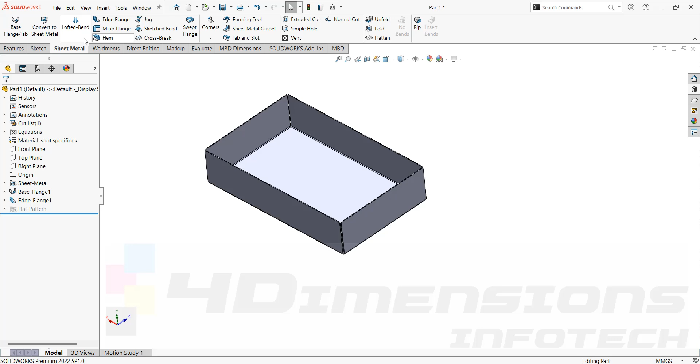So hello everyone, today we are going to see Forming Tool command in Sheet Metal. This is the session 3 for Sheet Metal. Earlier we have seen all the basic commands such as base flange, edge flange, sketched bend, unfold, fold, flatten, extruded cut and more. So today we are going to see Forming Tool operation.

You can see here in the above tab, Forming operation. If you just keep the cursor on that, it will show the definition, that is, uses the parts that act as a die to bend, stretch or otherwise form a sheet metal. Means we are going to make a simple part in part modeling, and then it will act as a die to bend the part, stretch the part or else to form the part in different shapes. So for that only forming tool is used. So we'll start with forming tool.

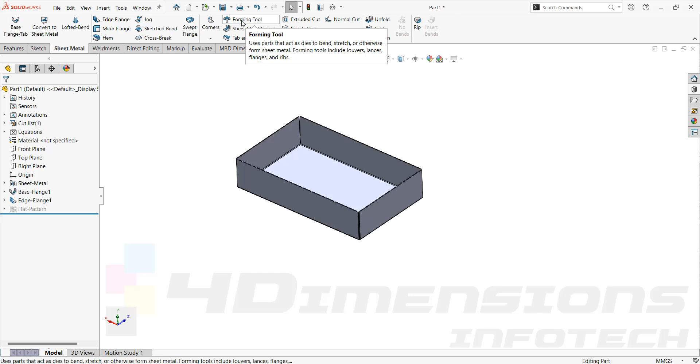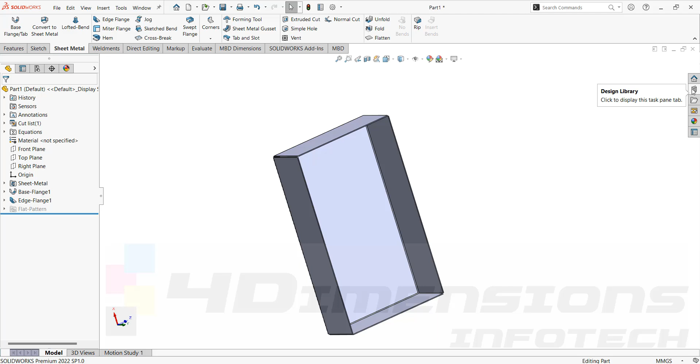We will manually make a tool here. I am saying it manually because there is a design library content also in which you can have a forming tool. But I have not added that add-ins while installation. That's why it is not showing me here forming tool option. But in design library also it is available. That's why I referred the word as we are going to make manually the forming tool. So to make the forming tool, I will switch my window to part modeling. Say part. And now in part modeling, we are going to see how to make this form tool.

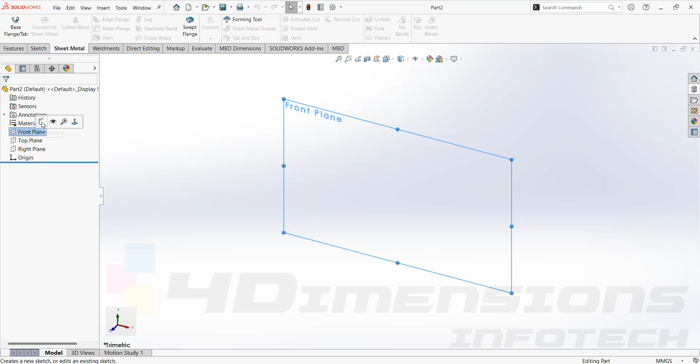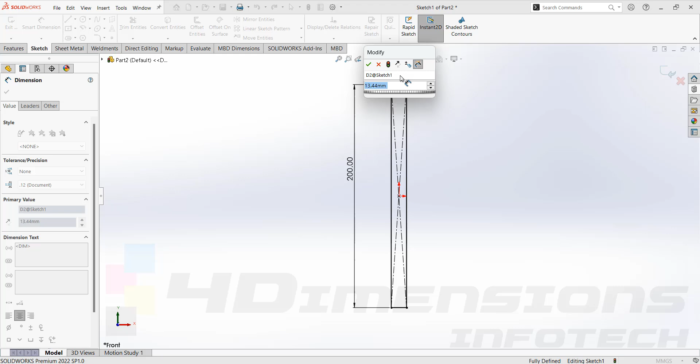I'll go in part, and here I'll start with making louvers here first. I'll select the sketch front plane. We'll make one center rectangle here. I'm using front plane here. Now it doesn't matter which size of rectangle you require. You just need to consider that the size of rectangle shape we are taking here should be always more than the forming tool size. Thickness you can take as much you want. I'll take it 10 mm only.

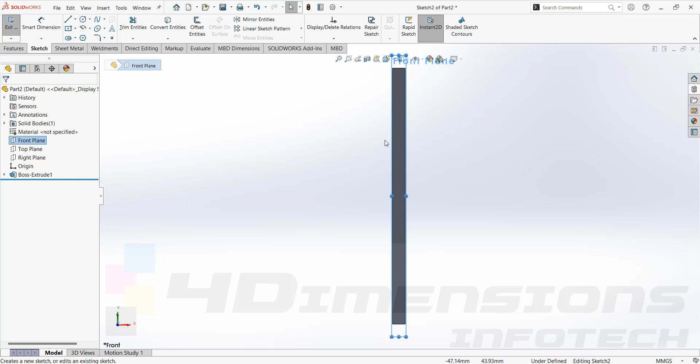Say features, extrude boss. And now while extruding the part, I'll extrude it from mid plane here. Now the role of this part is nothing but to add fillet at the outer direction. For that only I have made this base part. Later I am going to delete this part. I'll take front plane here, say sketch. Front plane was lying in between the part, that's why I have taken front plane. Now we will make sketch to form louvers here.

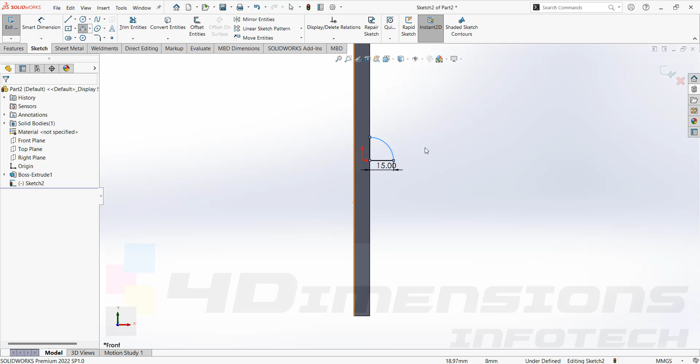Take two lines perpendicular to each other with equal length. I'll say it 15 mm. The other size also 15. I'll say relation between them as equal relation between two lines. Now add one curve also here. I'll take 3-point arc. And we will provide the radius here also as 15 only. Now I have a complete fully defined sketch at mid of the body, that is on front plane.

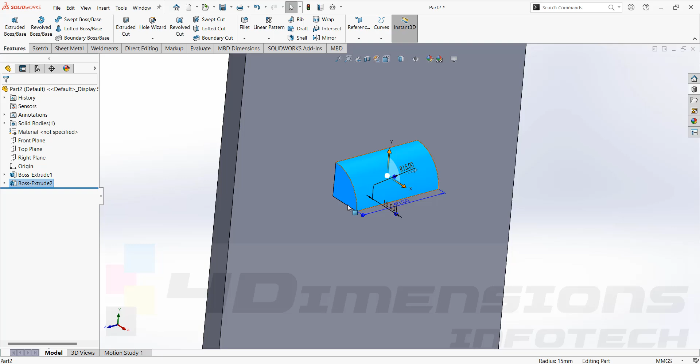Now I'll make extrude boss here. We will extrude it till 40 mm from mid plane. Say OK. Next, I'll select this face here. Say sketch. And I'll select the face and say convert entities. Now these complete edges are converted to sketches. You can see a close entity is formed here. I'll use it for the feature revolve boss.

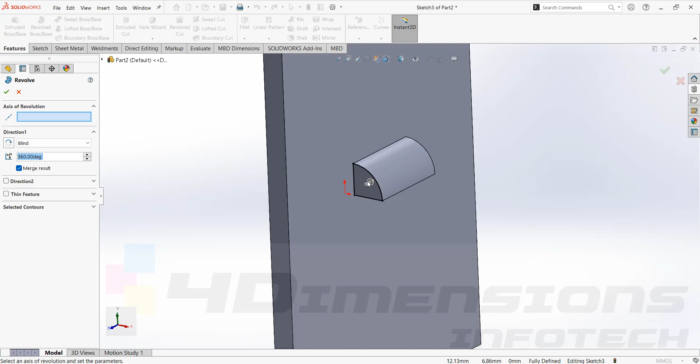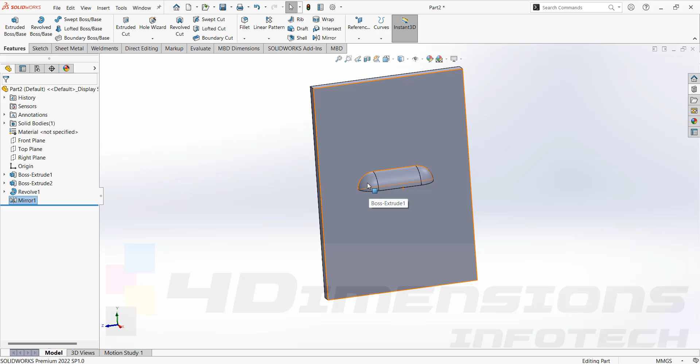I'll consider this line as an axis for revolve, and I'll take this angle as 90 degree here. Say it OK. And I'll mirror this portion at the other side also. So I'll take mid plane here. Say mirror command, features to mirror, and OK. Now this particular feature revolve has been mirrored at the other side also, and our part is completed.

But we have to keep in mind that we have to provide fillets at the edges. As this part is going to be punched in a sheet metal part, at that time, for the withdrawal of this part, these edges should be filleted.

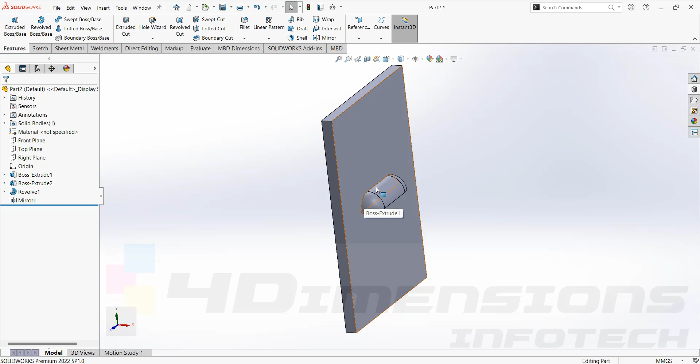If there is a sharp edge, the other part on which we are going to punch the forming tool may get damaged or may have cuts there. That's why we have to provide fillets here around the edges, and it is compulsory that we take a fillet more than the thickness of the part on which we are going to apply the forming tool.

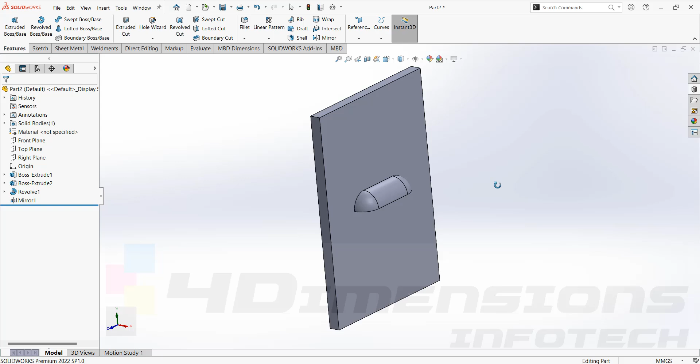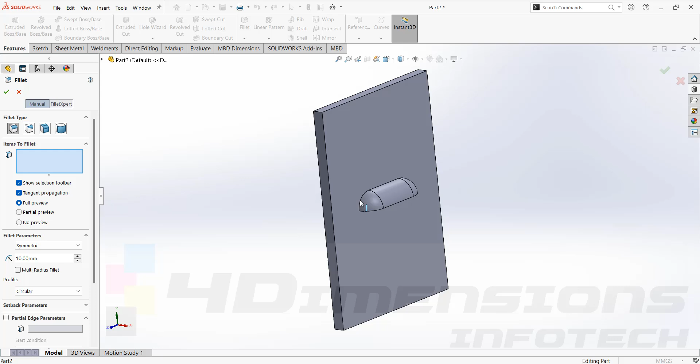Suppose I have taken this part; we have already taken the part here. The thickness for this part was, I'll select this edge, it will show me the thickness here, 1.5 mm. So I need to select the fillet size more than 1.5 mm for the forming tool. So I'll go for the fillet option and select the edges. Fillet is coming around it, and the value for the fillet I'll take here as 3 mm.

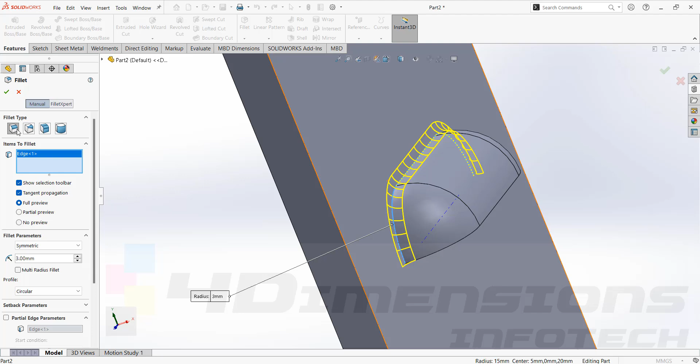This 3 mm value has been taken for the fillet, and now you can see why I have made this surface, so that this fillet should lie on the particular surface outside. If I had not made this plate here, this fillet would have come at the internal side of the part. It would not have been a concave shape, it would have been a convex shape here. That's why I've taken this plate here, so as to make this fillet in a concave shape. Say OK.

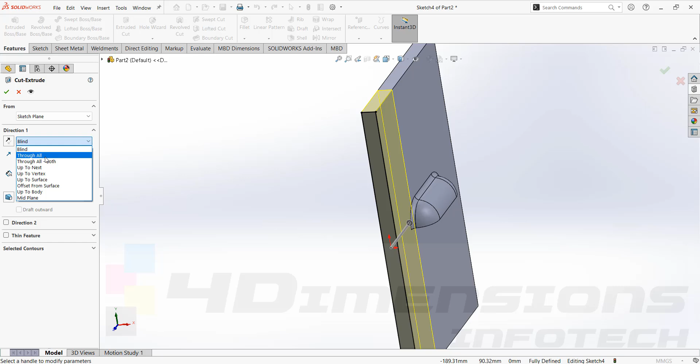Now we will remove this plate here. So I'll select this face, say sketch, and I'll convert that face here. Now you can see one rectangular sketch has been formed. Say features and extrude cut. I'll completely cut this part, say blind and through all. Only through all is needed there. And now you can see one louver shape part has been made here.

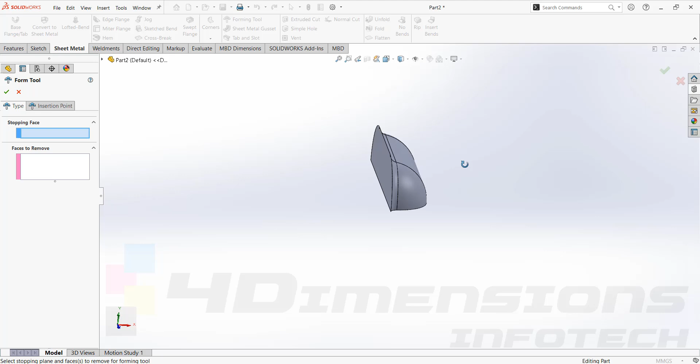Now we will move to the sheet metal tab. And here you have the option forming tool. Select the forming tool after making the part. Now we have to add the stopping face. The stopping face is the face which is going to be attached on the sheet metal surface. So I'll consider this as the stopping face, and for faces to remove I'll consider the bottom face here. We need to ventilate the air from this part, that's why we need to remove this face compulsorily here.

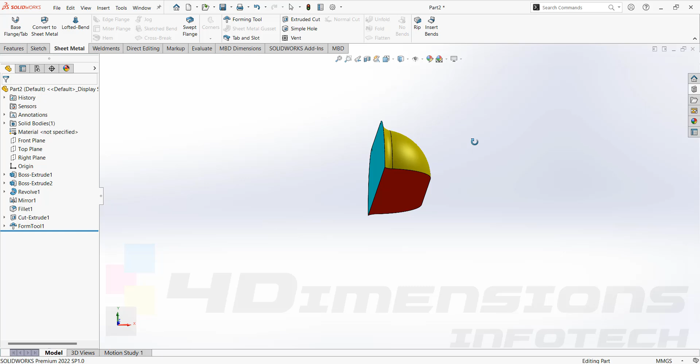I'll say OK. Now these color codes will also indicate which face is the stopping face and which is to be removed. Red color will represent the faces to be removed, and sky blue color will represent the stopping face. Still this part is in a part modeling format only. We have to change it to a forming tool. So the upcoming step here is very important.

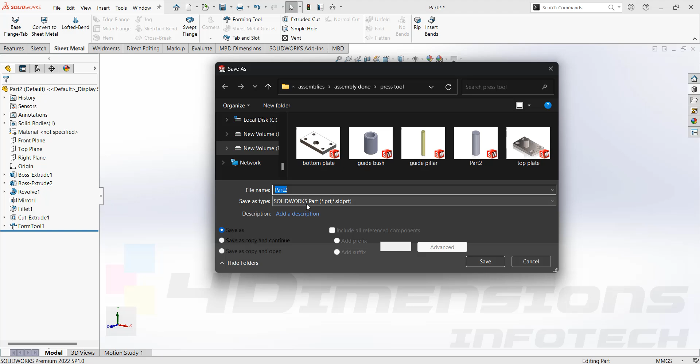For that we will go for the save as option, and during save as you have to change the save as type. Instead of SolidWorks part, I am going to select form tool here. The extension for form tool is SLDFTP. We have to save the name here. So I'll keep the name here as form 1 or form tool, and then show where we have to save this part. So I'll save it on desktop here. I'll go for the desktop option, and on desktop I'm going to save this part with the name form tool and type also as form tool.

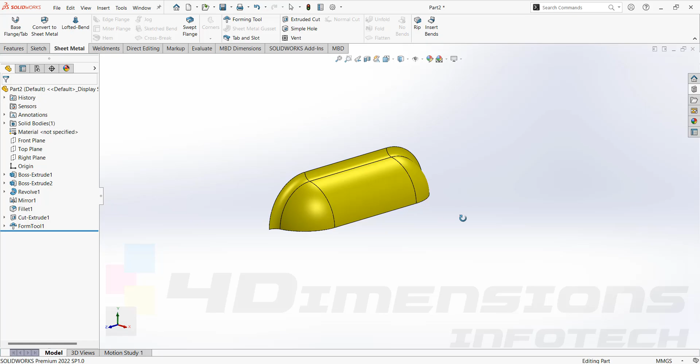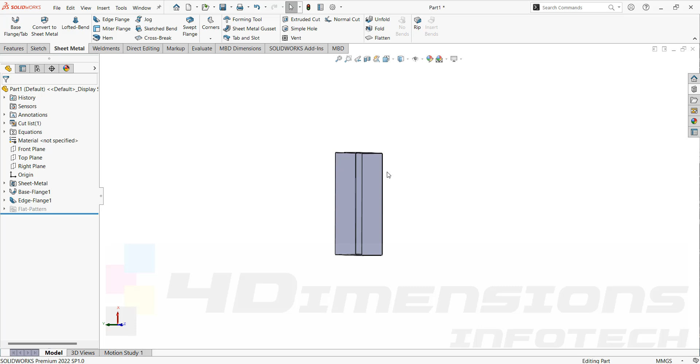So it is very important that you change the save type. Say save, and now this part is being saved as a form tool. You can see on desktop the file will be shown in this format, a simple white page with extension SLDFTP. Next I'm going to go for the form tool option, and we are going to apply the form tool on this part here. To apply the form tool, here is the option at the right side.

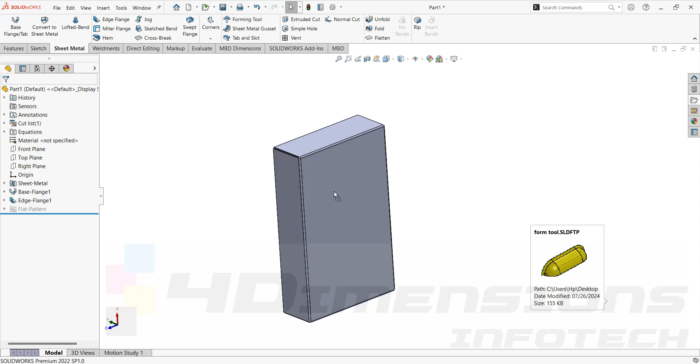Select this file explorer option, and I'll go on desktop to browse. Here we have the name form tool and extension SLDFTP. The window will pop up and also show the appearance of that particular form tool. So I'll select the form tool and directly drag it on the part. Now you can see this form tool has been applied. We have given the stopping face, so it has been applied on the outer side here, and this form tool orientation is coming at the inner side here.

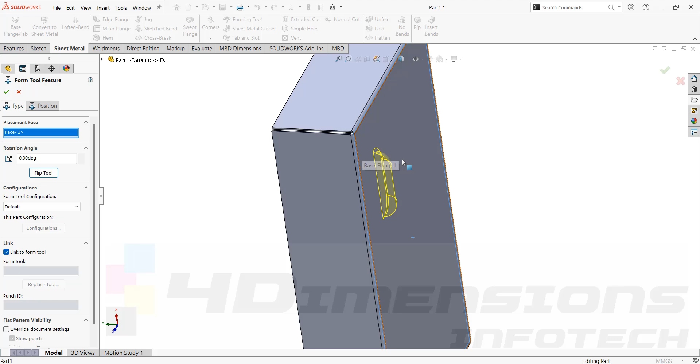If you want to flip the orientation, I'll flip the orientation. Now the stopping face will become this internal face, and the orientation will come at the outer side. So wherever the stopping face is, the orientation will come at the opposite side. Suppose I want to orient it at a particular angle; I'll make it horizontal by giving the angle as 90 degrees here. So instead of 90, I'll give it 270 degrees. Now you can see the form tool has been placed.

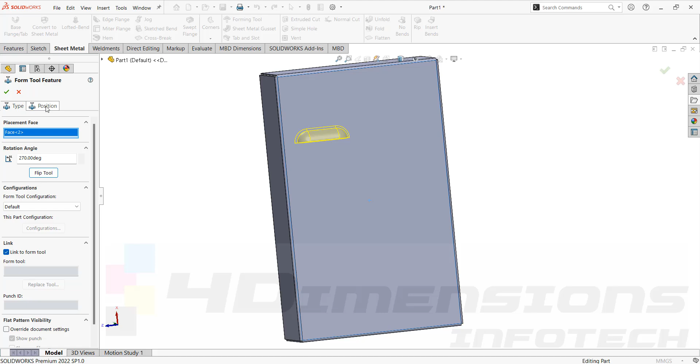Now I want to position the form tool by giving dimensions. For that I'm going to go for position. It is the same as the hole wizard command. In hole wizard also we go to position and then position the hole. The same way we have to do it here also.

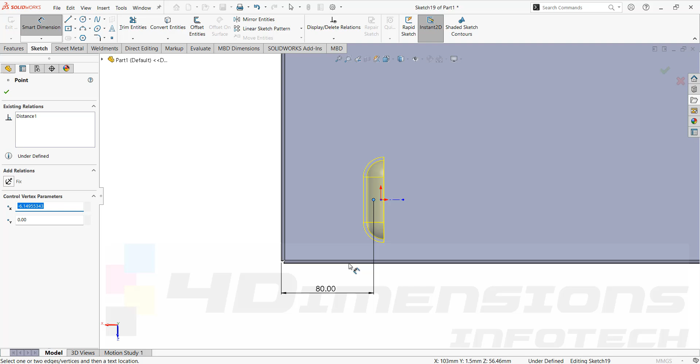Select the references, say 80 mm, and the other outer reference I will take here as 60 mm. Now I have positioned this part here. I'll say OK. And now one form tool has been applied here. You can see here this form tool has been applied.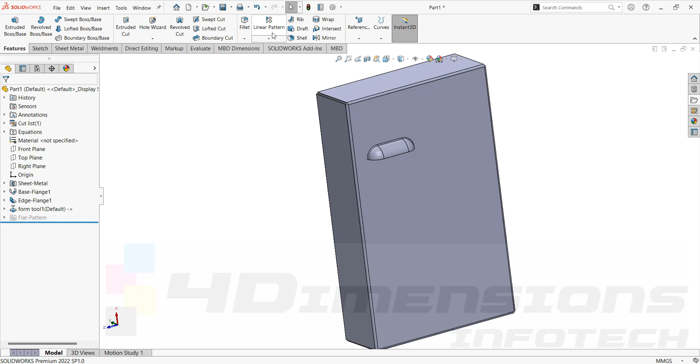Now I want to pattern this form tool horizontally and vertically. For that I am going to go in the Features tab. Select the linear pattern command. In direction 1, I'll keep this direction as 1 and this direction as 2. So for the references I have shown the edges here. Features to pattern, I am going to go and show the forming tool here.

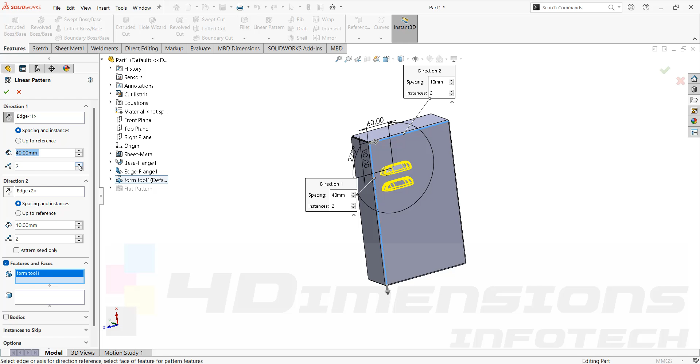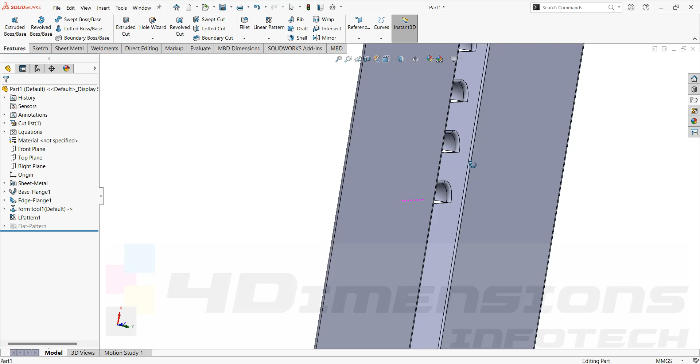You just put in the distance and number of entities you require. Here also in Y direction. Sorry, next direction. And then say OK. So now this form tool has been applied here. You can see this was the removal face for air to ventilate, and this was the stopping face which has been applied at the internal face here.

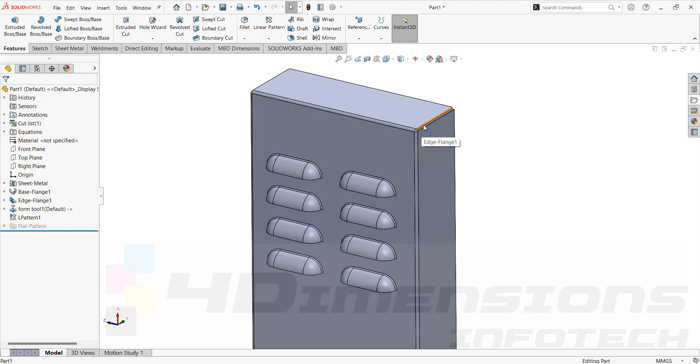So this fillet was a must, and the value for the fillet should always be greater than the thickness. Compulsorily you have to take this value in this format only, that fillet size should always be greater than the thickness given. Now next, again we will go for one more type of forming tool here.

I'll say file, new and part. We'll go in part again. This time we are going to make a bridge here. We have seen all the bridges here. So a single bridge form type I am going to make here. This type of bridge. So we'll start here by making a part only. I select the top plane, say sketch, center rectangle.

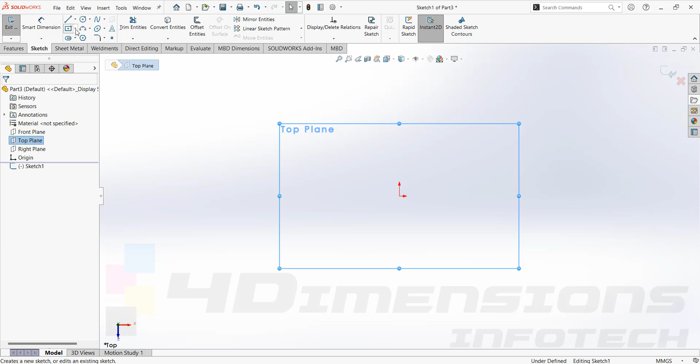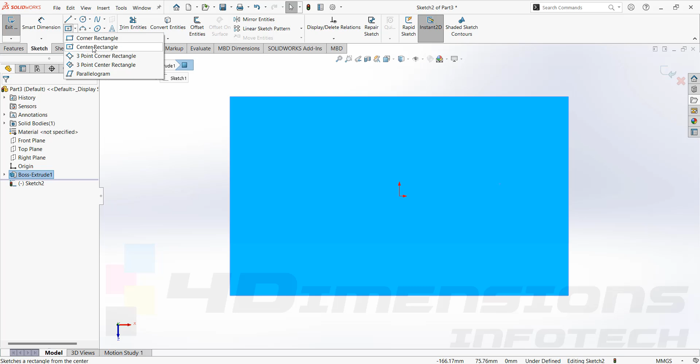The base plate I am going to make here is only for the fillet, so as to apply the concave shape there, 200 mm. This base plate size should always be greater than the forming tool size. Whatever size you take doesn't matter. Say OK. Again select the sketch and go for center rectangle here. Features and extrude boss.

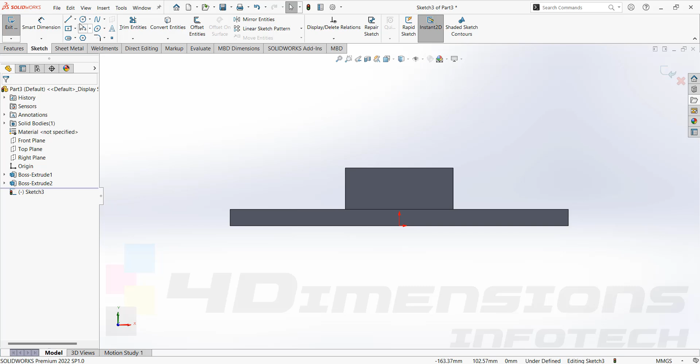I'll make this extrude boss straight. Say OK. I'll decrease this height here. I'll say 25 only here. Update the value. And now we will delete the corners. I'll draw one closed profile here. For the inclination face, I'm going to give the angle here. I'll say 60 degrees.

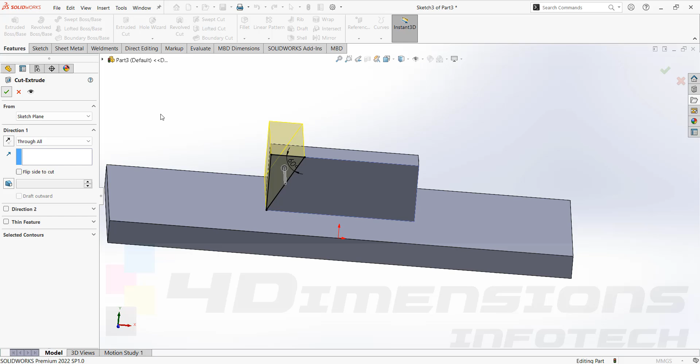Features, extrude, cut. Through all cut I need here. I'll mirror this cut on the other side also. The tool we are going to make here is the bridge used as a form tool. Next, we need to apply fillets. So I'll take the fillet here as 2 mm or 3 mm. I'll take a little bit larger size. I'll take it as 5 mm.

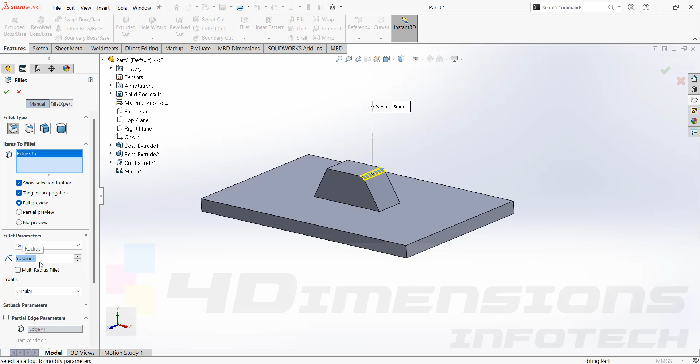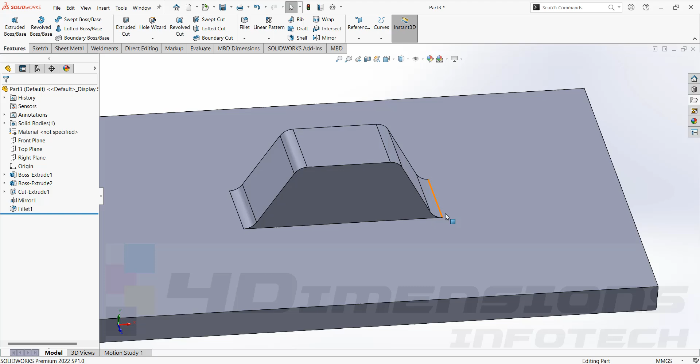So the fillet should be applied on these above corners and the below corners. All the 4 sides. It doesn't need to be applied on the sides here. Say OK. And now we'll remove this bottom plate, as we have taken this fillet in a convex shape. Just we needed the support for this fillet. That's why we have made this plate.

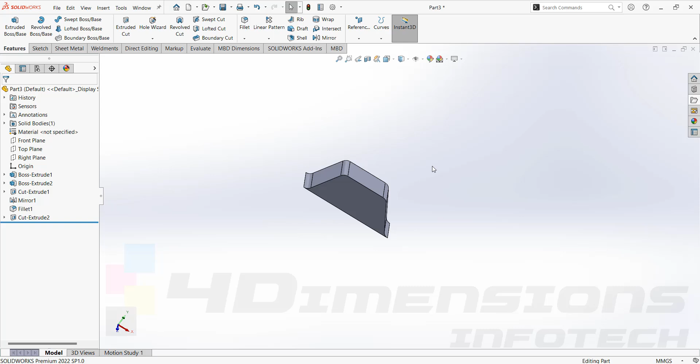We'll select this face and say sketch, convert entities, features and extrude cut. Cut I'll take through all here. And now the shape of the forming tool has been completed. I'll go in sheet metal, say forming tool. I'll show these as a stopping face and faces to remove. You can see the image here.

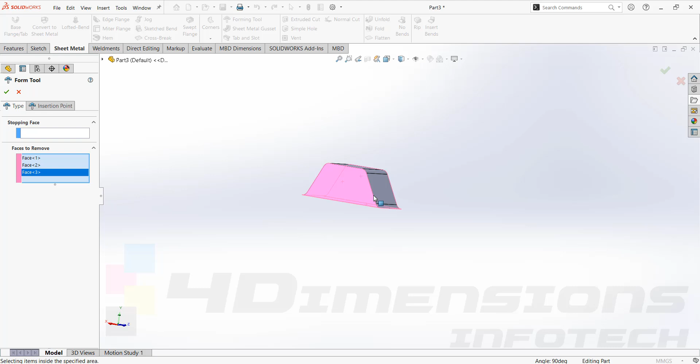So the side faces are being removed here. I'll refer the side faces only for removing. So faces to remove, I'll add these faces, first and second one. And stopping face, I'll add this face here as a stopping face. Say OK. Now this form tool has been made, but still is in a part modeling way only. So we need to convert it by saving.

Say save as. I'll save it on desktop only again. I'll give it a name as form 2 or bridge only. You have to change the extension here. I'll save it as form tool, file format SLDFTP. So it has been saved at desktop. Name is given and type also given. And now we'll go for the part on which we have to apply the form tool.

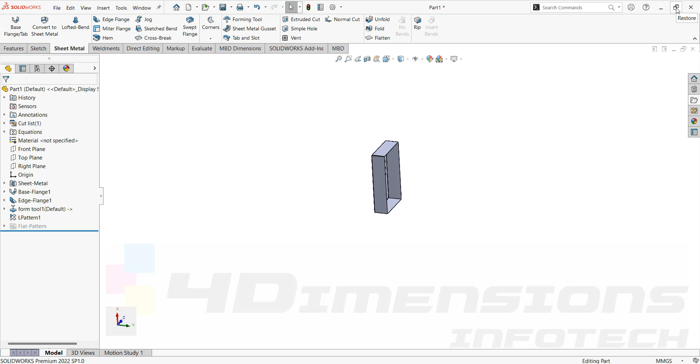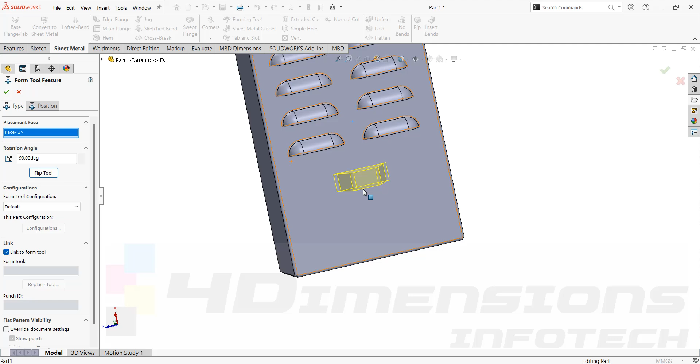I'll restore this size. So now we will apply the bridge over here. I'll restore the screen. You can see on desktop this bridge part has been saved. I'll drag this part and apply it on the face. Maximize the screen. Change the orientation by angle. Flip the required side. I want it to be applied externally. Then position the part here.

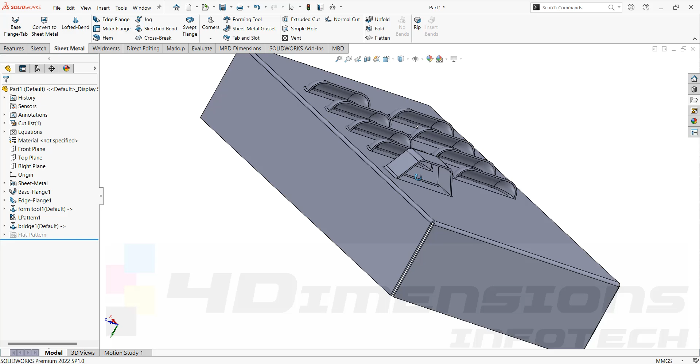Say smart dimension. And apply the required position. I'll say 50 mm from the side. And say OK again. And now you can see this bridge shape has been applied by using the form tool here.

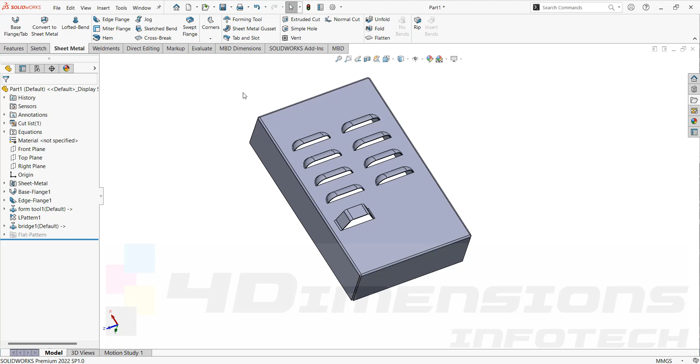So this was the form tool command. In this way you can apply form tools of different shapes and sizes by customizing the sizes and applying them using the form tool option. You just need to keep two notes in mind. First, we have to take this fillet compulsorily, and that fillet size should always be greater than the thickness.

Second, you have to save it with Save As as a form tool file only. Then only it will be applied as a form tool. If you save it as a part, then it will not apply as a form tool there. So we'll continue with the Gusset command next.

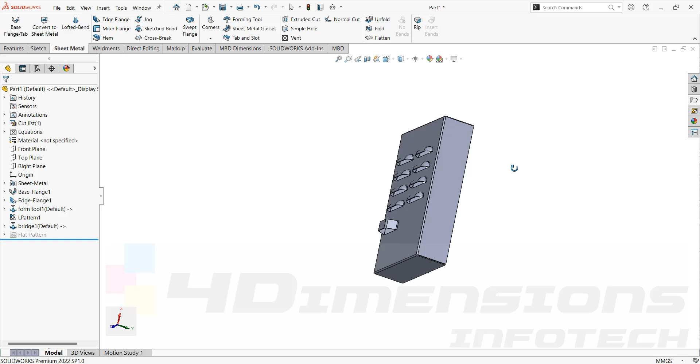So the next part we are going to see here is sheet metal gusset. Gussets are nothing but ribs which are provided to support the two perpendicular faces in sheet metal. For that we are going to go for this command, sheet metal gusset. Select the required faces for the position of the gusset. I'll show you the images first.

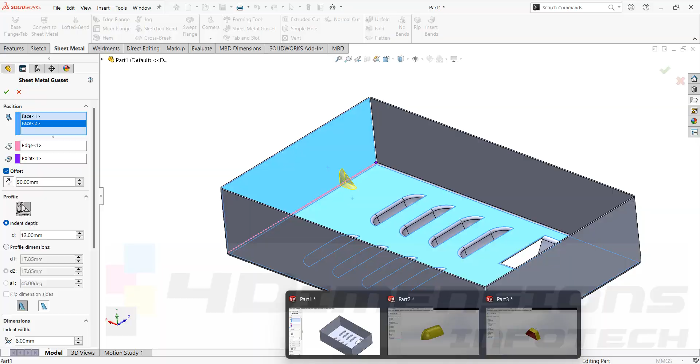So you can see between these two flanges, one gusset is being provided for the support. You can see here also in this part, these are the sheet metal gussets. There are some more parts here. You can see on these parts also. On this bracket also a gusset is being provided.

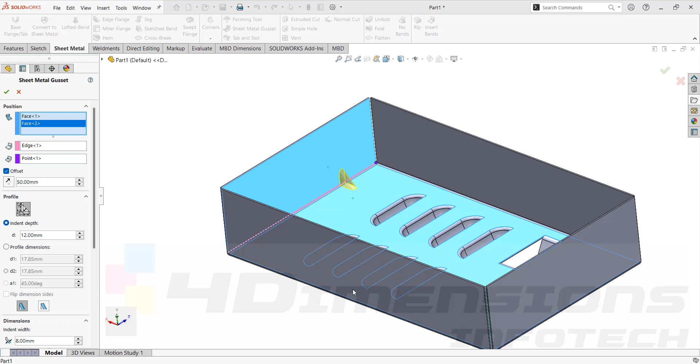So to start with gusset, select the command. Select the two perpendicular faces and the gusset will appear there. It will take the offset distance of 50 mm. So the reference for the distance will be this end point. You can see this point has been highlighted here. So the distance has been measured from this point to the center of the gusset.

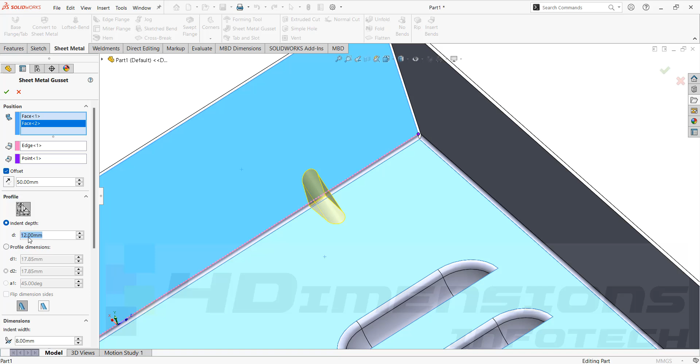For sizes, I will provide the indent depth. It means the overall depth or size. I'll take it as 15 mm. So this indent depth is nothing but the overall depth. It means that the vertical and horizontal distances will be common here. Suppose I am taking it 15 mm. I'll say 20 mm. You can see the overall size has been increased here.

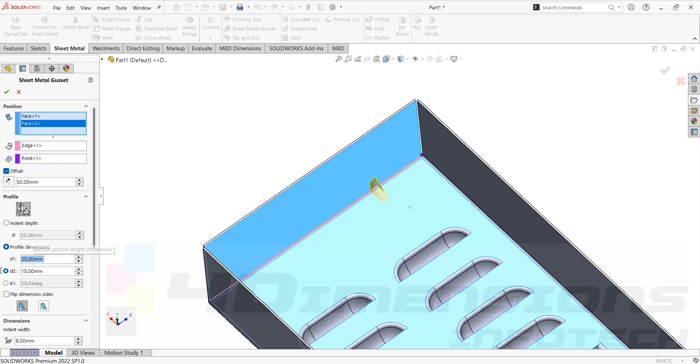Suppose if you want to provide individual dimensions, then you can go for the profile dimensions option. And here you can provide the individual dimensions for D1, D2 and angle. So I'll take this dimension as 25 here. On the other side also 25. Next, the shape of the front face. If I want, I'll take a rounded gusset. If I want flat, I'll go for this option, that is flat gusset.

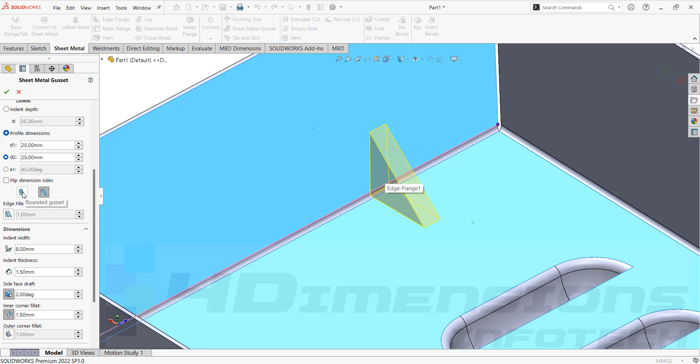If you are taking a flat gusset, then edge fillets are a must here. And suppose if you are going for a round gusset, this option will automatically disappear. You can see. Next is indent width. Suppose I want the width of the gusset to be taken as 10 mm. So you can see the change here. Thickness I will keep as it is, that is 1.5. Thickness should not be changed here. It should be taken as the part thickness only.

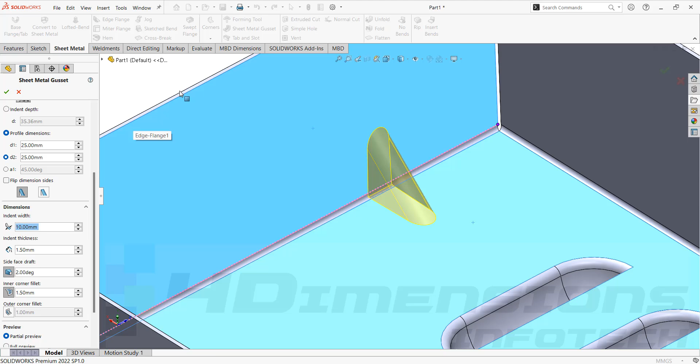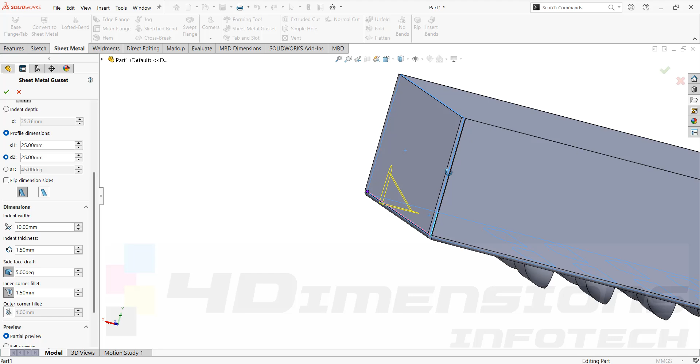Then there is an option for side face draft. You can see these two side faces are being drafted here by 2 degrees. If you want to change the value, I'll say 5 degrees here. So you can see here, now the angle between two faces is 5 degrees. Draft angle is provided because the operation to provide the gusset is similar to a forming tool. I'll say OK and show you.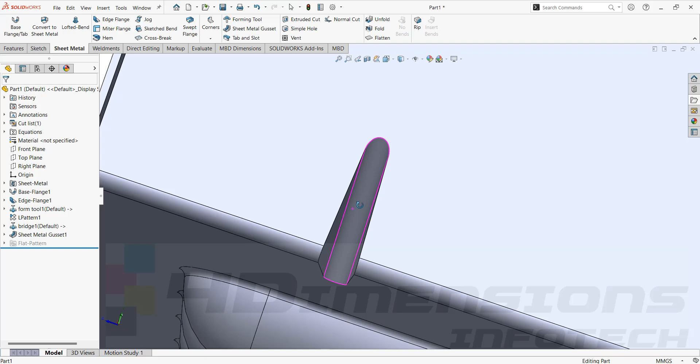So when you punch this part, to withdraw the die which we have punched to make this cavity, if the die does not have any fillets or tapered angle, it may damage the part here and may create cracks or cut the part, as it is a thin sheet metal part. That's why drafted faces are provided for the easy withdrawal of the tool or die.

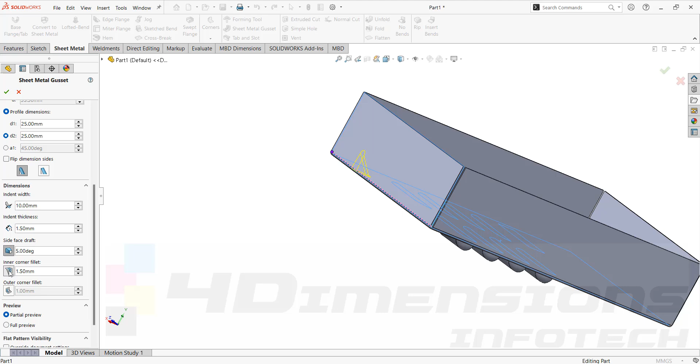We'll go on sheet metal gusset, say edit feature, and provide the inner corner fillets. We have provided the inner corner fillets here. You can see in full preview. This option will show the complete preview which is going to come on the part. So we have inner side fillets. We just need to provide the outer fillet here. I'll turn on this option also. So outer fillets have now been provided.

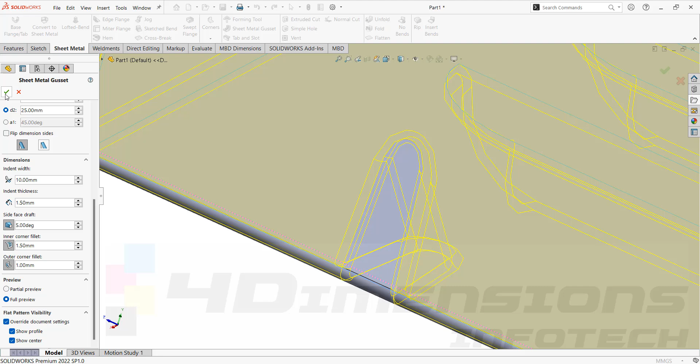If you want to show this gusset in flat pattern, then turn on these options: override document settings, show profile, show center. Then only the gusset profile will be visible in flat pattern, or else it will not show. Say OK then. Now this gusset has been provided. If I want to flatten this, I'll show it in flatten view.

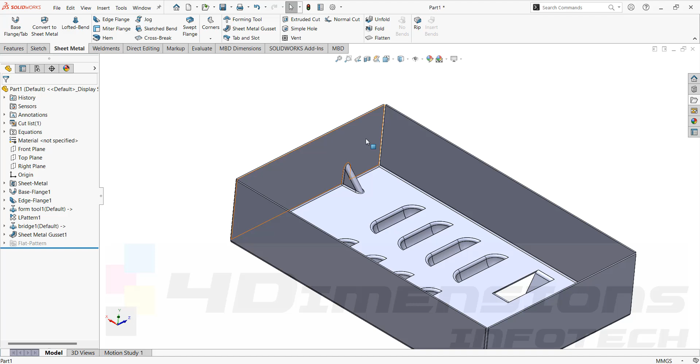So this was the gusset option, same as form tool. You just need to provide dimensions, parameters, draft angle and two faces for the references. So this was forming tool and gusset in this lecture. There are some more commands remaining for sheet metal. We'll continue in further lectures.